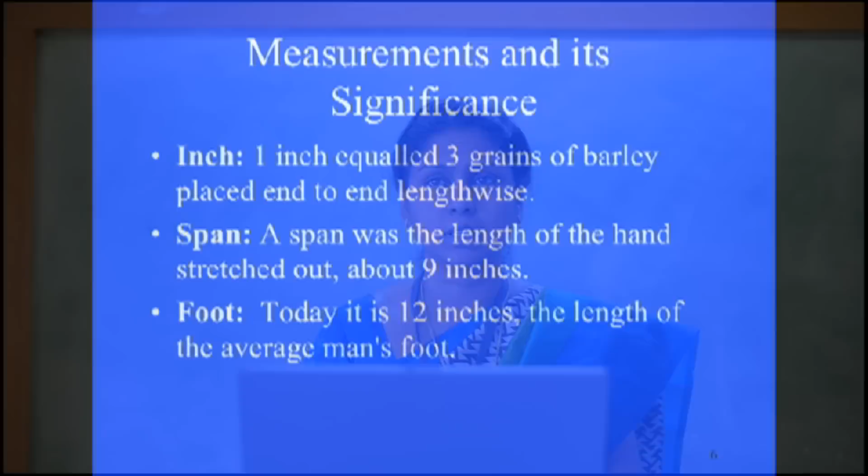In today's class, I would take you through the importance of measurements, followed by different methods of measurement, various categories into which instruments can be classified. Then I will explain about the various elements of measuring system, and lastly, performance characteristics.

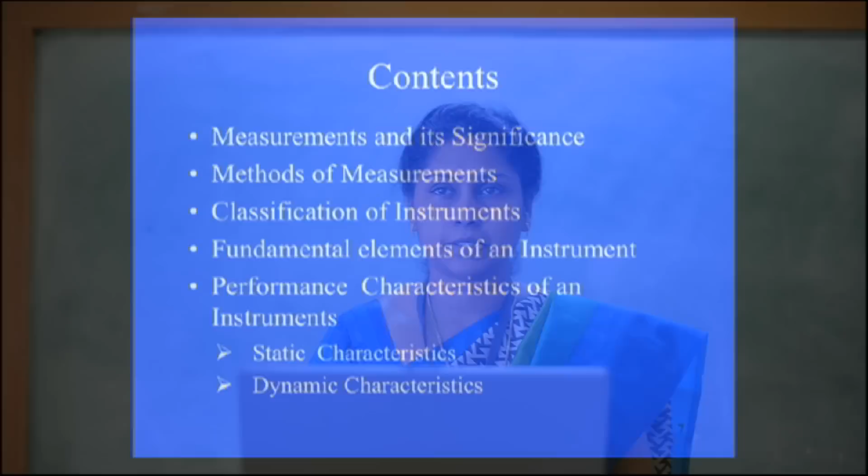First, let us have a bird's eye view of measurements. Before that, tell me, what are the requirements of the measurements? Anybody? Okay, let me tell you. Measurements should be highly accurate, reliable and also consistent.

Next we will see what is measurement. Measurement has got plenty of definitions, let us see a few of them. A measurement is an act of measuring something. In other words, measurement is a quantification of a dimension such as length, weight, etc., usually expressed as numbers.

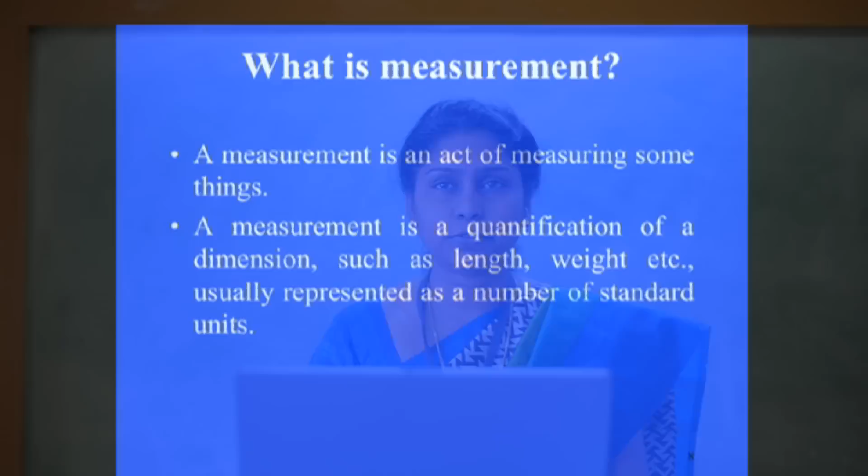Or else it can be defined like this: a measurement is a process of comparison between the unknown quantity and a standard one. Or else the measurement can be defined as a process of conversion of a physical parameter into meaningful numbers.

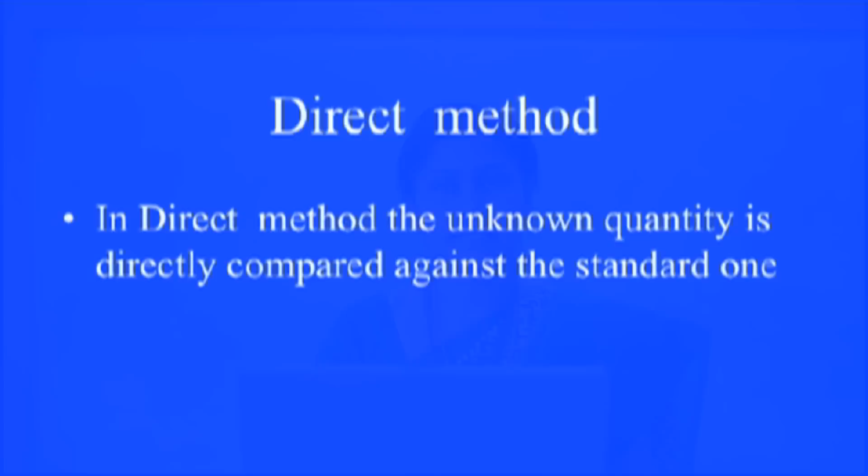The way in which we make measurements can be classified into two methods: direct method and indirect method. In direct method, the quantity is obtained directly by comparing it with the standard value, and it involves no mathematical calculations. For instance, the level of liquid in a tank can be measured using a measuring tape, the length of a bar can be measured using a vernier caliper, and the temperature of a body can be measured using a thermometer. All these have a predefined scale, or predefined marking, on them.

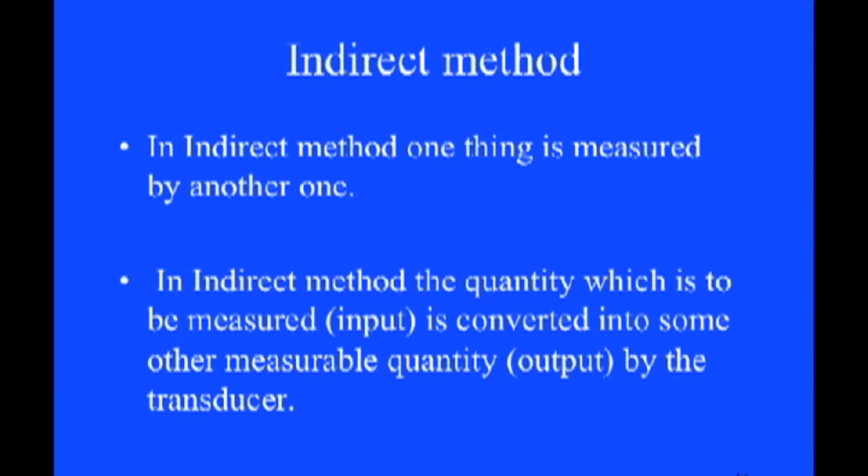Now coming to the indirect method: there are a number of quantities that cannot be measured directly. For example, strain cannot be measured directly. We cannot measure the strain in a bar due to the applied force directly.

With the help of indirect measurement, we can measure the height of a pole without directly measuring it. In order to use this indirect method, we need to do some calculations, sometimes, not always. The indirect method to measure the height of the pole can be such that the unknown length is measured using a formula.

Another example of indirect measurement is the venturimeter, where the velocity is measured in terms of pressure.

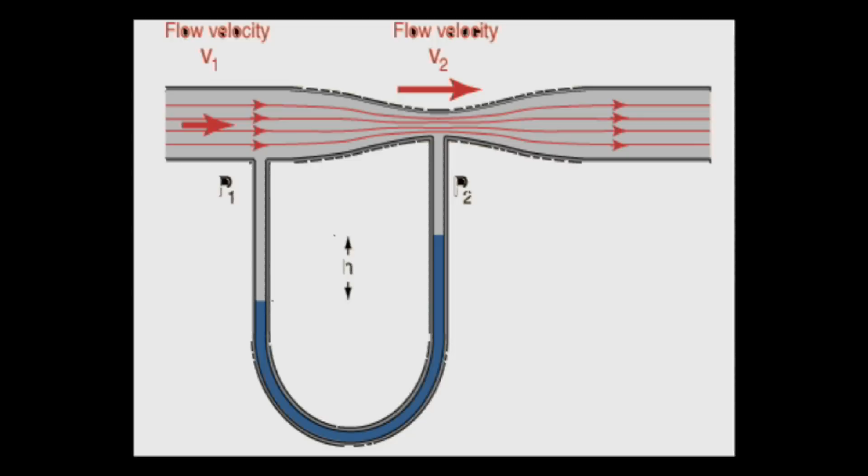Next, coming to the classification of instruments: instruments can be classified based on their application. They can be classified into active and passive instruments, analog and digital instruments, null and deflection type instruments, and absolute and secondary type instruments.

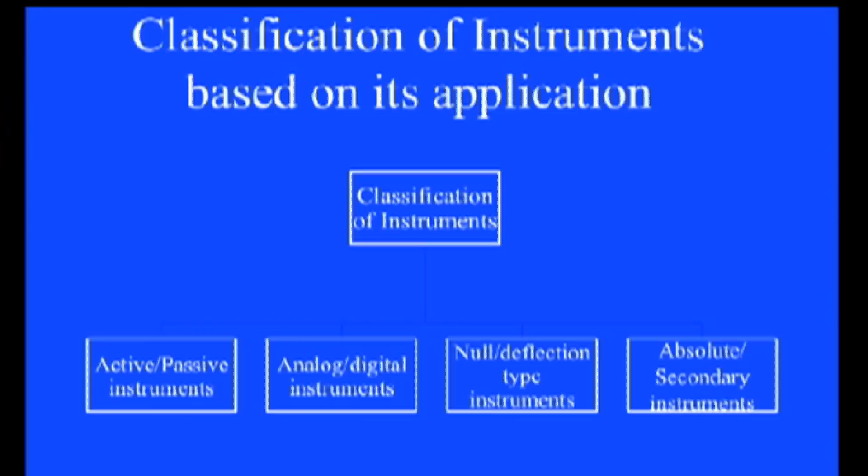Now coming to active and passive instruments. An active instrument generates output directly in response to the change in the input; it does not require any external energy to operate. Whereas passive instruments require electrical energy, additional energy, or an excitation voltage to operate. An example of an active instrument is a pressure gauge, where when pressure is given, the pointer indicates the unknown pressure without requiring any external energy.

But in the case of a passive instrument, as shown in this picture, a level measurement device is depicted. The float is used as a level sensor. The other end of the float is connected to a potentiometer, and when the level of the liquid moves up and down, the float moves up and down along with it. The other end of the float wipes over the arm of the potentiometer, which is excited with an input voltage, and the output voltage will be the indication of the level of the liquid.

Coming to the next one: analog and digital type instruments.

Analog instruments vary in a continuous fashion and take an infinite number of values within a given range. An instrument which gives output in discrete steps, or takes finite values in a given range, is called a digital instrument. Examples of analog instruments are ammeters and voltmeters, and examples of digital instruments are the tachometer, multimeter, etc.

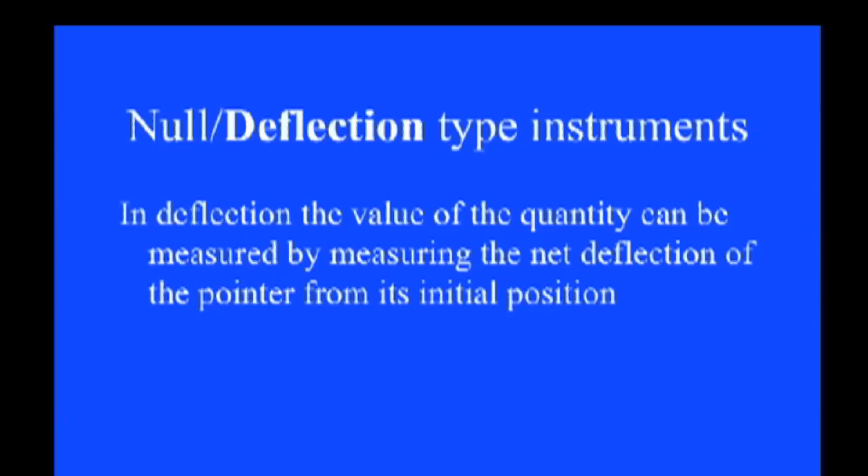The next classification is null and deflection type instruments. Null instruments attempt to maintain the deflection at zero by an opposing force. In deflection type instruments, the value of the quantity is measured by measuring the net deflection of the pointer from its initial position.

The next classification is absolute and secondary type instruments. Absolute instruments give the magnitude of the quantity under measurement in terms of the physical constants of the instrument. An example is the galvanometer.

The second type is the secondary instrument, where the deflection gives the magnitude of the electrical quantity to be measured directly. Examples are the voltmeter and thermometer.

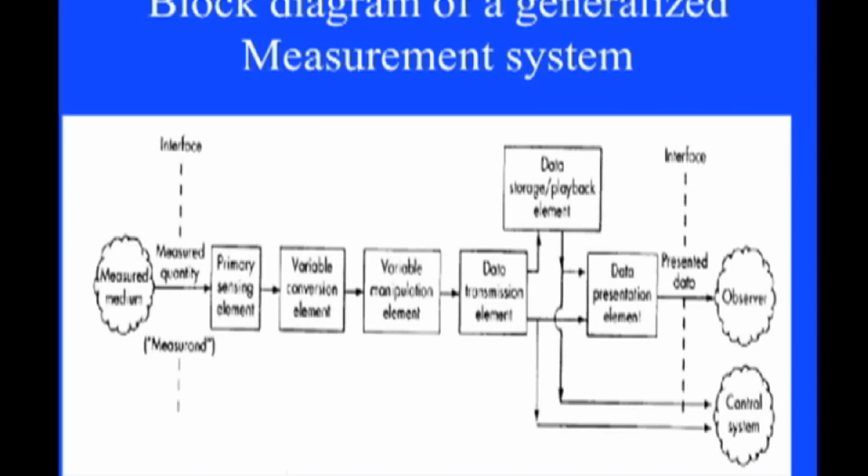Now coming to the general measuring system, it has elements like the primary sensing element, variable conversion element, variable manipulation element, data transmission element, data storage/playback element, and data presentation element.

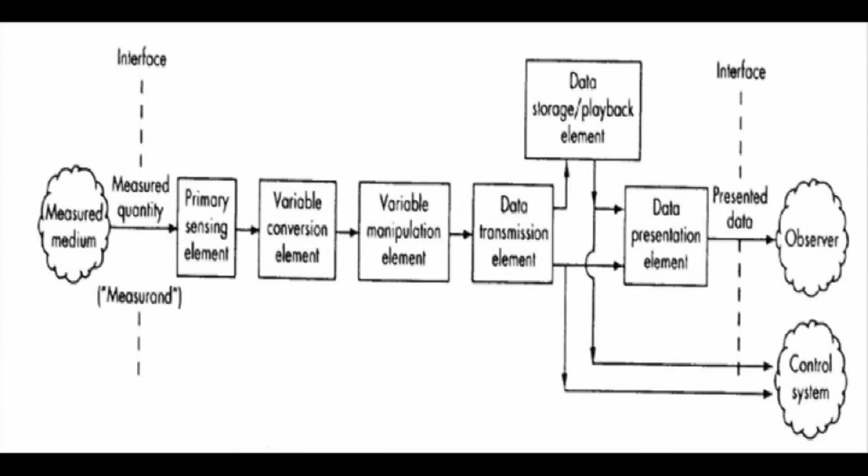We will see the performance of each element one by one. Each functional element is made up of a group of components which perform the required steps of measurement. First is the primary sensing element. The quantity under measurement makes contact with the sensor, and this is followed by conversion of the physical quantity into an electrical quantity, done by the primary sensing element.

In the variable conversion element, the output of the primary sensing element is converted into some suitable form while preserving the information of the original signal.

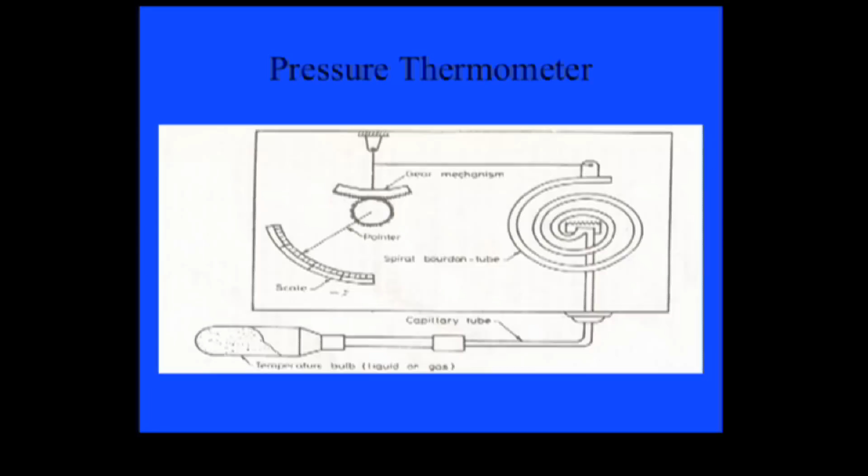The next is the variable manipulation element. This element manipulates the signal, meaning it changes the numerical value of the signal. An example could be amplification using an amplifier.

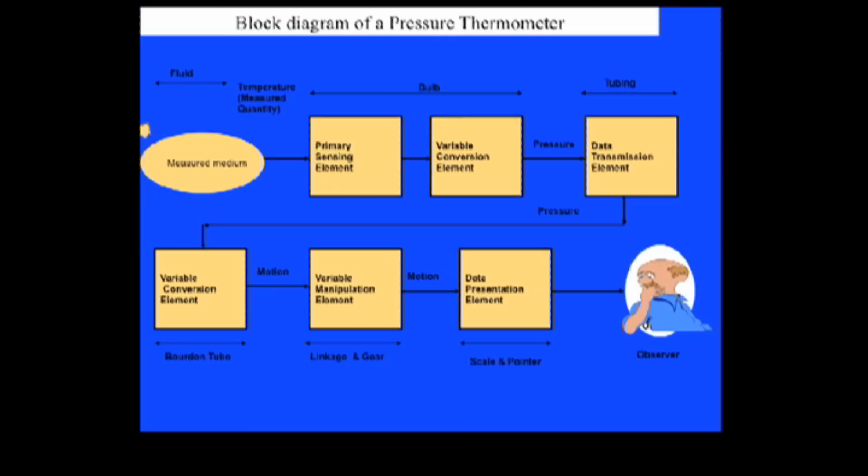The next is the data transmission element. When the elements of an instrument are physically separated, it becomes necessary to transmit data from one place to another. The element that performs this function is called the data transmission element.

Lastly, the data storage/playback element, which is optional.

The next is the data presentation element. The information about the quantity under measurement has to be conveyed to the person handling the instrument. This data presentation could be a scale with a pointer like in a voltmeter or ammeter, or it could be a CRO, a TV, a camera, etc.

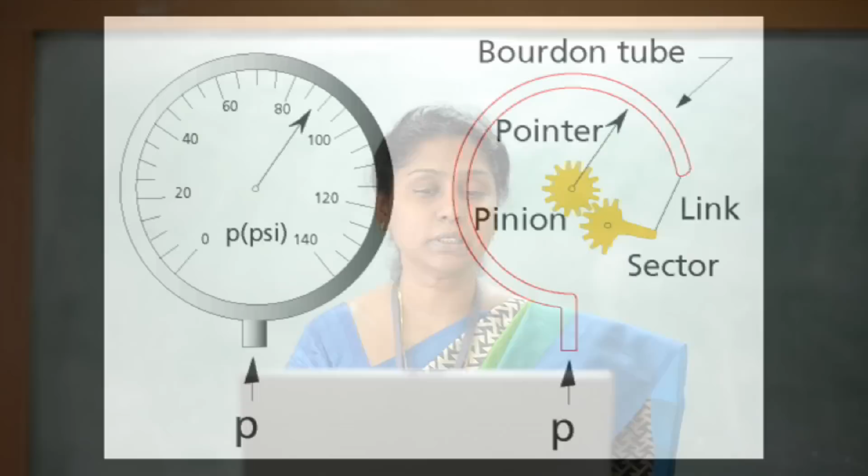As an example of a measurement system, let us consider a simple Bourdon tube pressure gauge, as shown in the picture. We can see the generalized measuring system using this example.

Let us see this simple Bourdon pressure gauge. This gauge offers a good example of a measuring system.

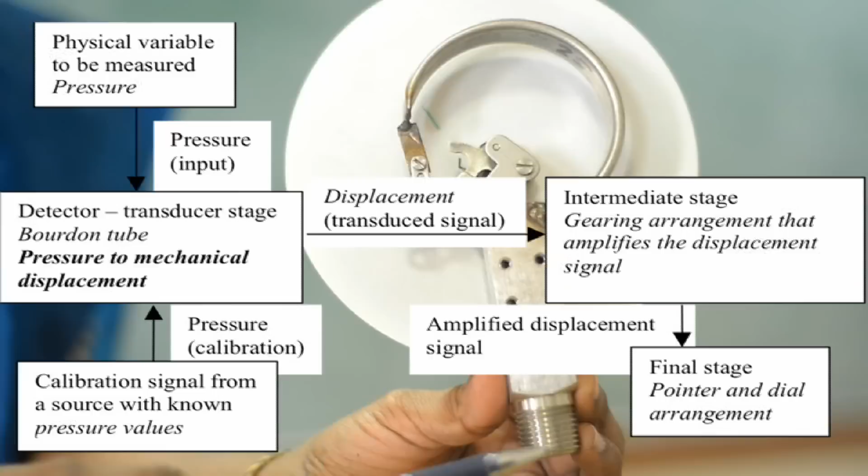In this case, the Bourdon tube acts as a primary sensing element and a variable conversion element. It senses the input quantity sent through this opening. On account of the pressure, the closed end of the Bourdon tube is displaced, and the length of the tube decreases, so it moves up. This pressure is converted into a small displacement.

This closed end of the Bourdon tube is connected through a mechanical linkage to a gear system you can see inside. The gear arrangement amplifies this small displacement and makes the pointer rotate. The mechanical linkage thus acts as a data transmission element, while the gear arrangement acts as a data manipulation element, which converts the small movement into a large angular displacement.

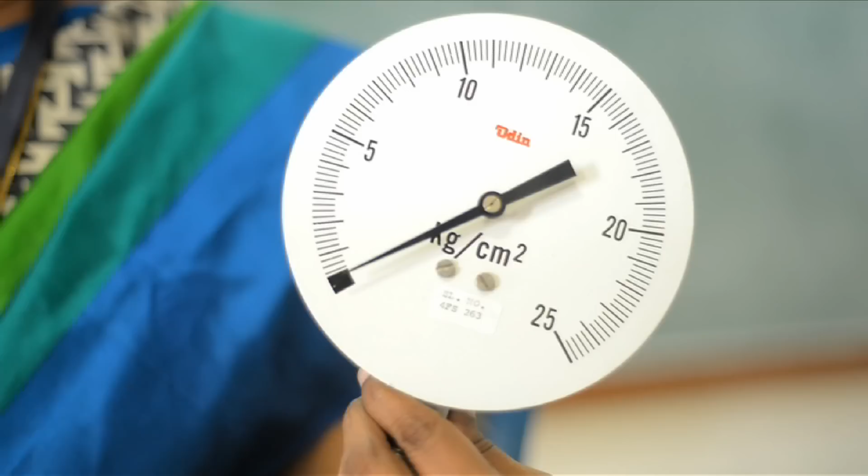This will be the best example for you to learn about the elements of a generalized measurement system.

When a measurement is made by an instrument, the value of the quantity is obtained. Then the following questions may arise: How accurate is your value? What is the amount of error in this measurement?

If I measure it over and over again, will I get the same value or not? What is the change in the output with a change in the input? And so on. To answer these questions, one has to know about the performance characteristics of any instrument.

These performance characteristics show how faithfully an instrument can measure. The performance characteristics can be defined in terms of static and dynamic characteristics.

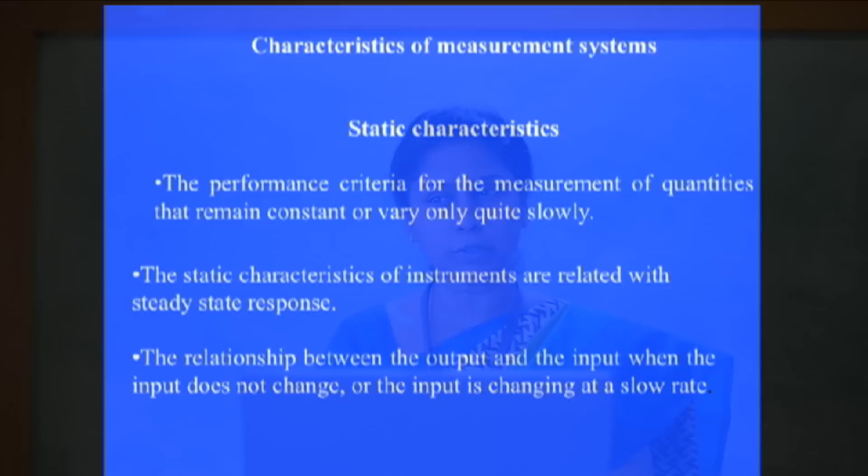If the performance of an instrument is tested by giving an input not varying with time, we call it static characteristics. On the other hand, dynamic characteristics involve inputs varying with time.

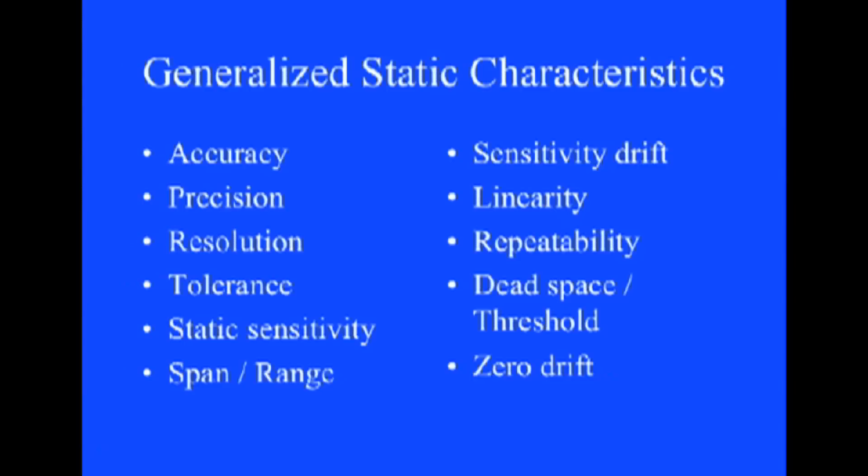Now let us see the characteristics one by one. We'll see the static characteristics. The terms of the static characteristics are accuracy, precision, resolution, tolerance, static sensitivity, span, range, sensitivity drift, linearity, repeatability, dead space, threshold, and zero drift.

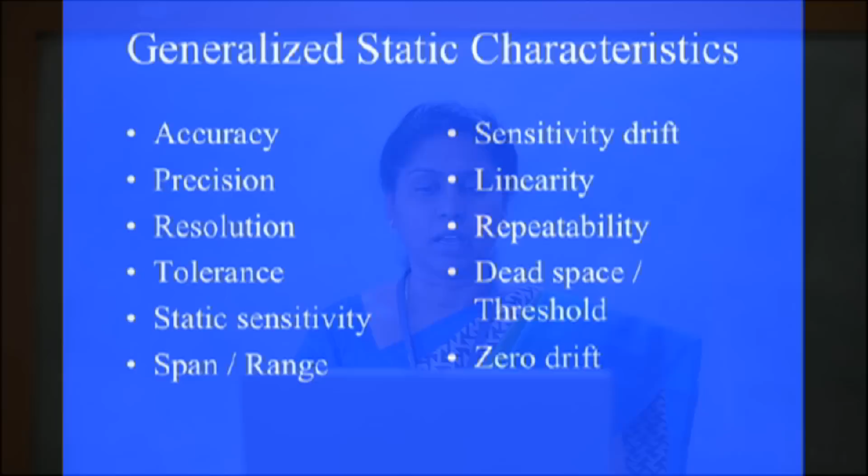Now let us see the static characteristics one by one. First we will see accuracy. Accuracy is defined as closeness of the instrument output to the true value of the measured quantity. I can put it in this way: it is a closeness of the standard value. How close the measured value is to the standard value is called accuracy. It could be expressed in terms of percentage also.

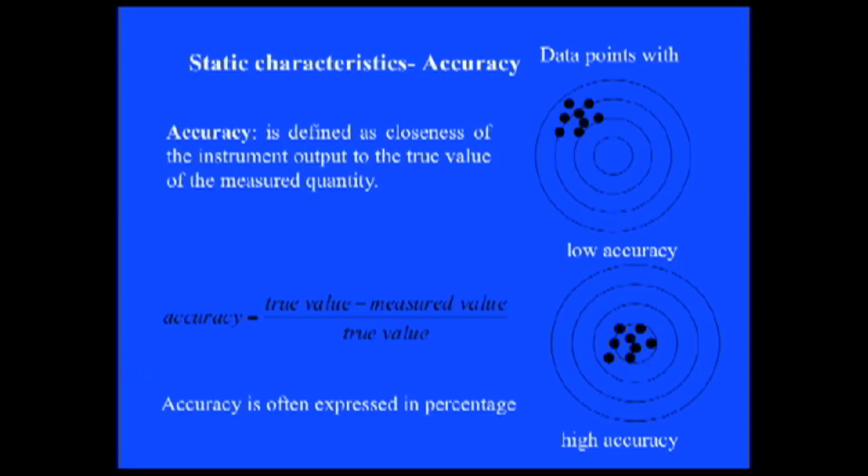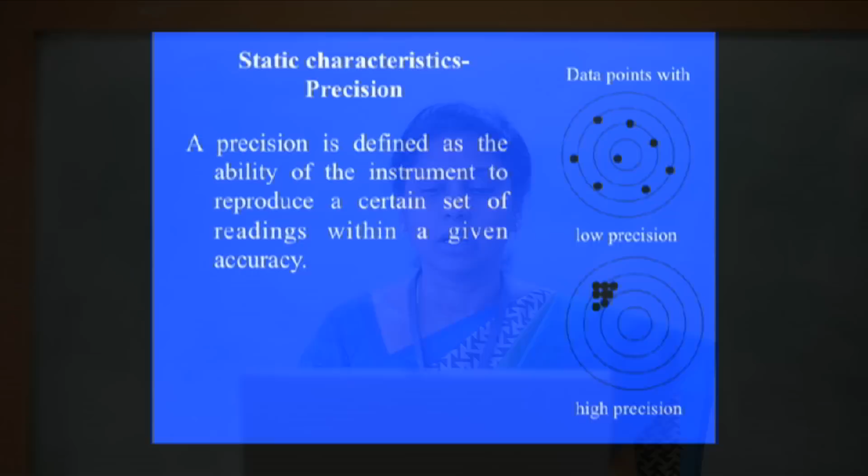Next is precision. Precision is defined as the ability of the instrument to reproduce the set of readings within the given accuracy. For example, this cannot be accurate, but it will be close among itself, among the readings taken at different points of time, but it will not be closer to the standard value.

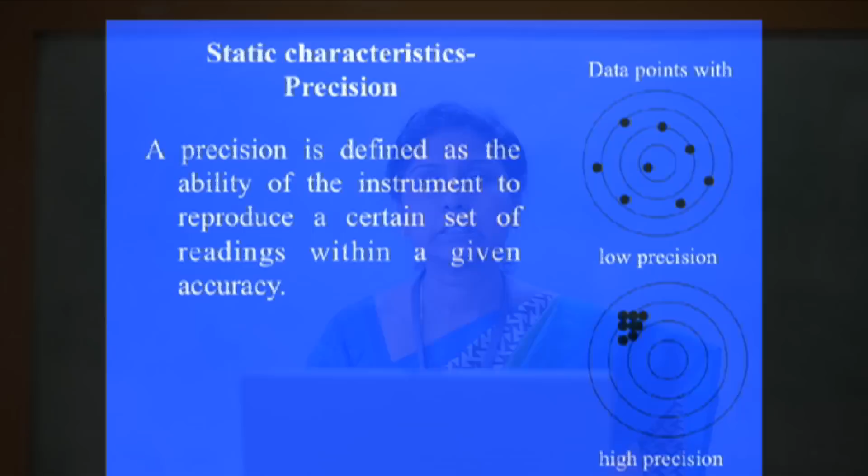The next is the resolution. The smallest change in the measured value which the instrument will respond to is called resolution.

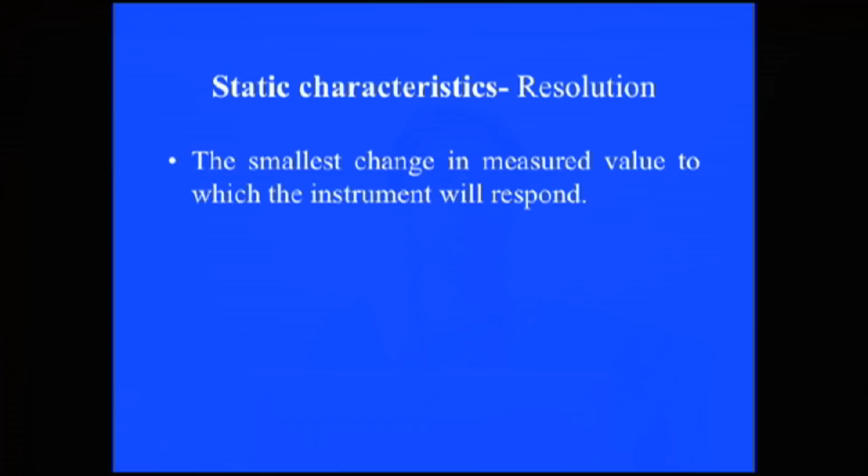The next is the sensitivity. We use the sensitivity term in day-to-day life - high sensitive, low sensitive. What is that? Sensitivity is the change in the output to the change in the input. If the change in the input is less and the change in the output is more, then we call it a highly sensitive instrument.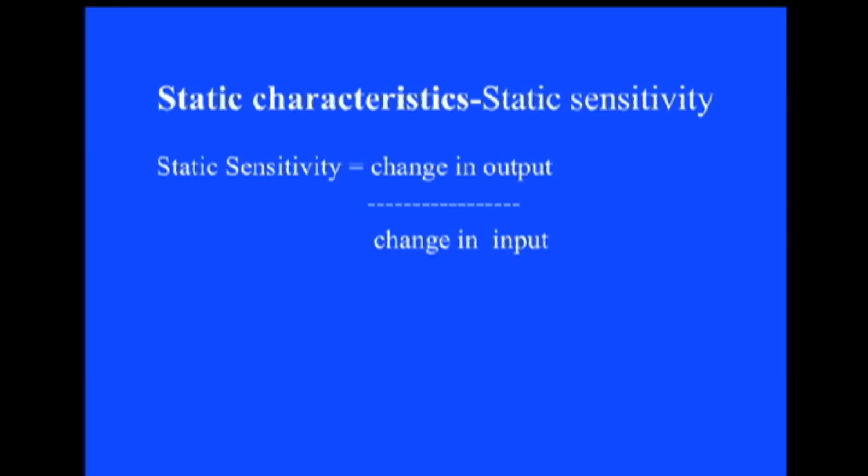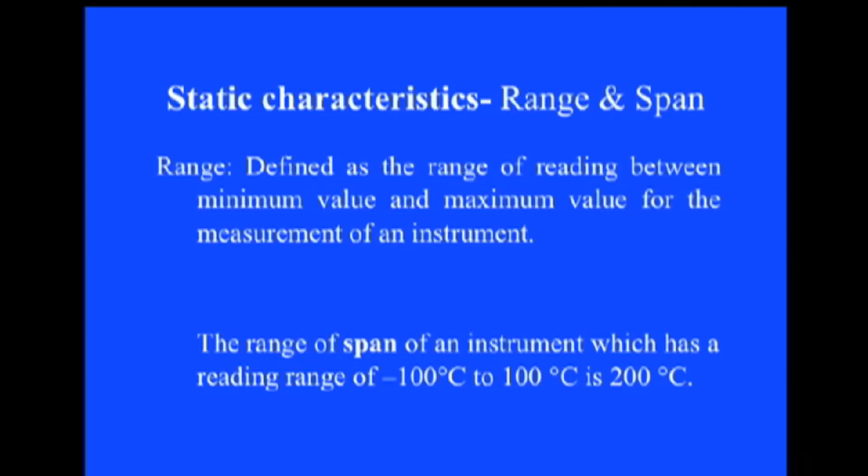Next is the range and span. Range is defined as the reading between the minimum value and the maximum value of an instrument. For example, if you take a thermometer, the minimum reading is suppose 0 degree and the higher range is 100 degree, then the range is 0 to 100 degrees. If the minimum reading is minus 100 degrees and the maximum is 200 degrees, then you call it the range as minus 100 degrees to 200 degrees. This you call it as range.

The span of an instrument is defined like this: it is the difference between the minimum and the maximum value. For example, if the minimum value is 0 and the maximum value is 100 degrees, the span is 100 degrees. Suppose the minimum value is minus 100 degrees and the maximum is 100 degrees, the span is 200 degrees.

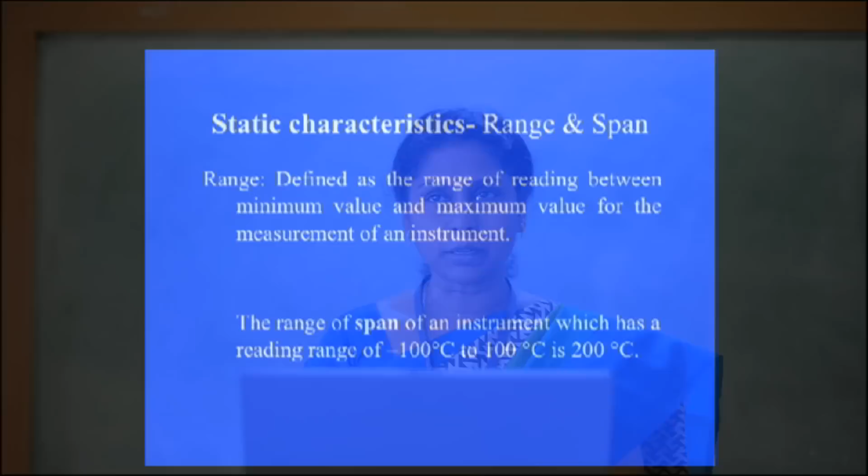Now let us see linearity. It is the measure of deviation of any of the calibration points from the straight line. It is the most desirable quality of an instrument.

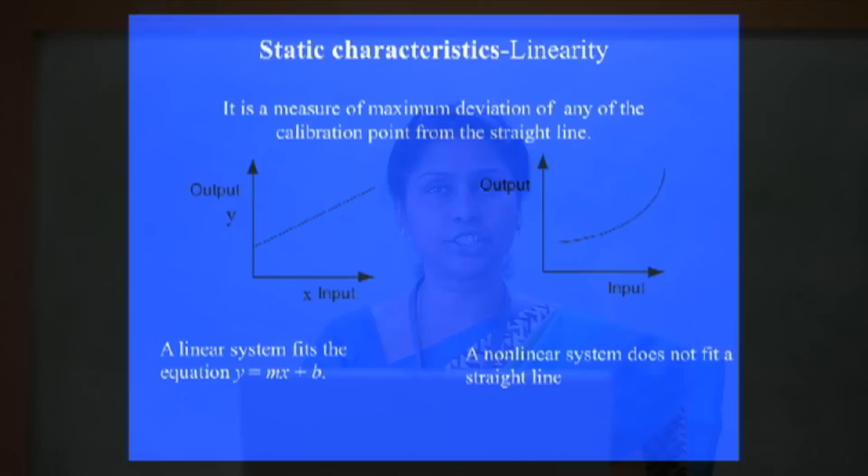Next we will see what is repeatability. Repeatability is a measure of how well the output returns to the given value when the same precise input is applied several times. Repeatability is also one of the desired qualities in an instrument. The formula is: repeatability equals maximum minus minimum divided by the full scale, into 100 percent.

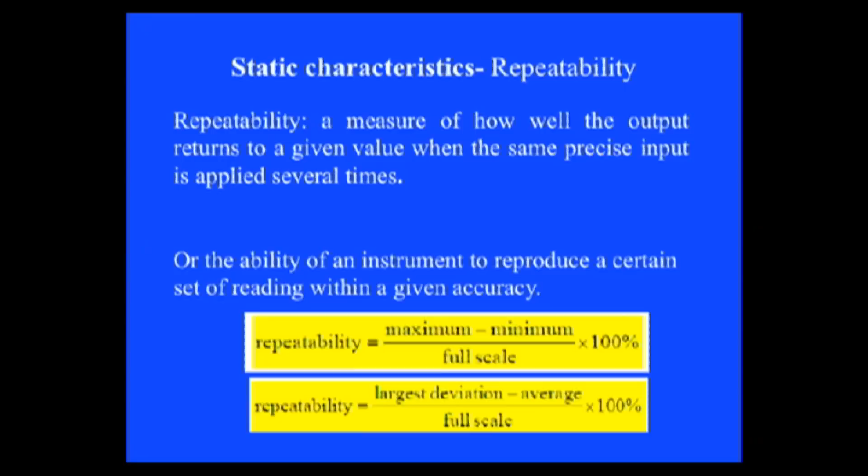The next is the dead space. Dead space is defined as the range of different input values over which there is no change in the output value. Even if you give the input, the instrument doesn't move. The range with which it doesn't move, we call it as dead space.

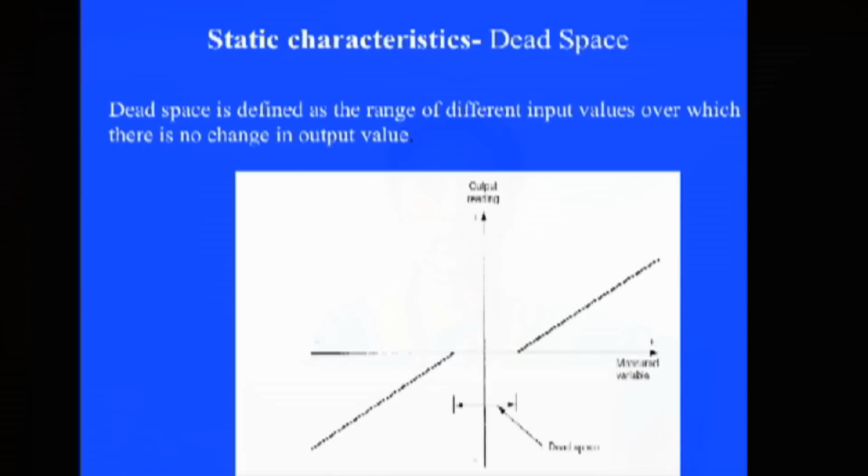Coming to dynamic characteristics, there are many terms, but I could list only three: speed of response, measuring lag, and fidelity.

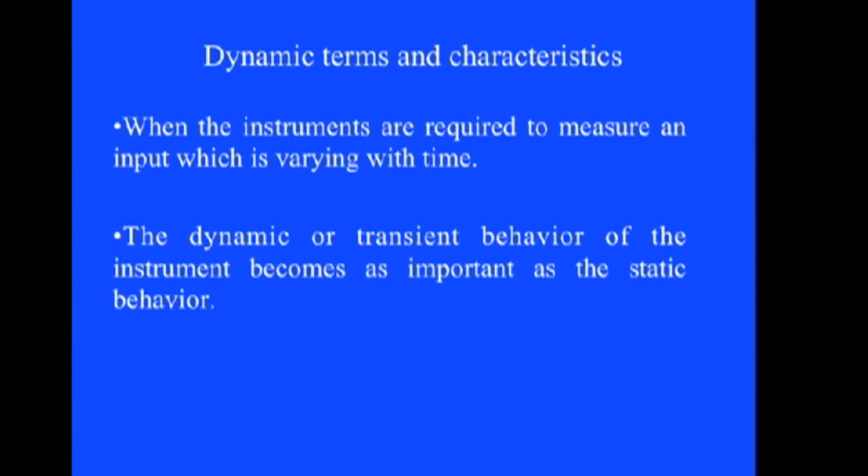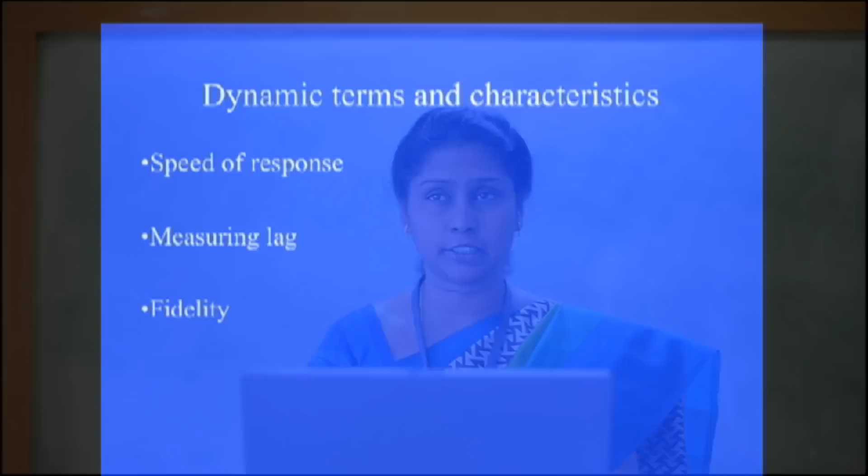This speed of response - in a measuring instrument, the speed of response or the responsiveness is defined as the rapidity with which an instrument responds to a change in the value of the quantity being measured. That is, the speed with which the input response happens is nothing but speed of response.

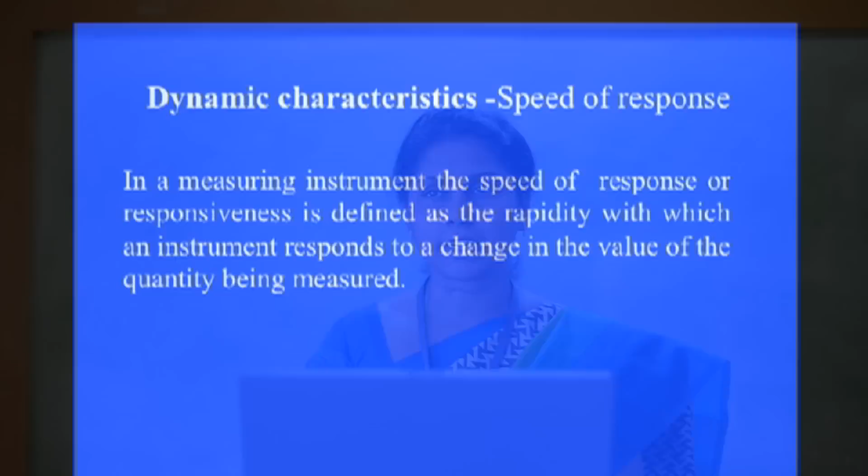Now this measurement lag is just like a dead space as we saw in static characteristics. Measuring lag refers to retardation or delay in response of an instrument to a change in the input signal. We call it as inertia sometimes.

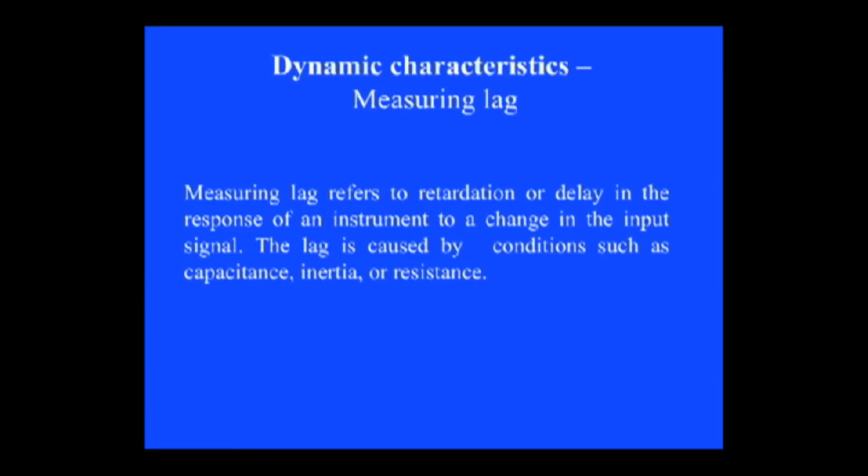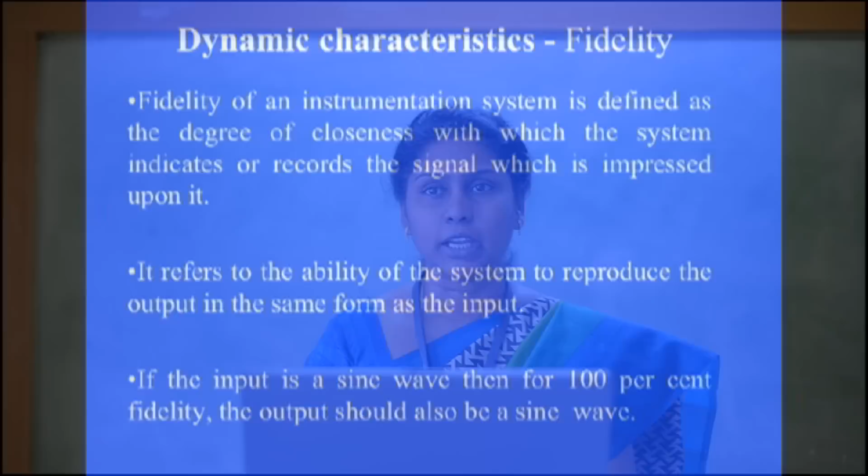Coming to fidelity - fidelity of an instrument is defined as a degree of closeness with which the system indicates or records the signal which is impressed upon it. In other words, it refers to the ability of the system to reproduce the output in the same form as the input.

Now we have come to the end of this session. The reference books I would recommend are Doebelin, Johnson's Process Control and Instrumentation, and Rangan, Sharma, Patranabis, and A.K. Sawhney. Another book is by Dominic Savio and Vimala Juliet.